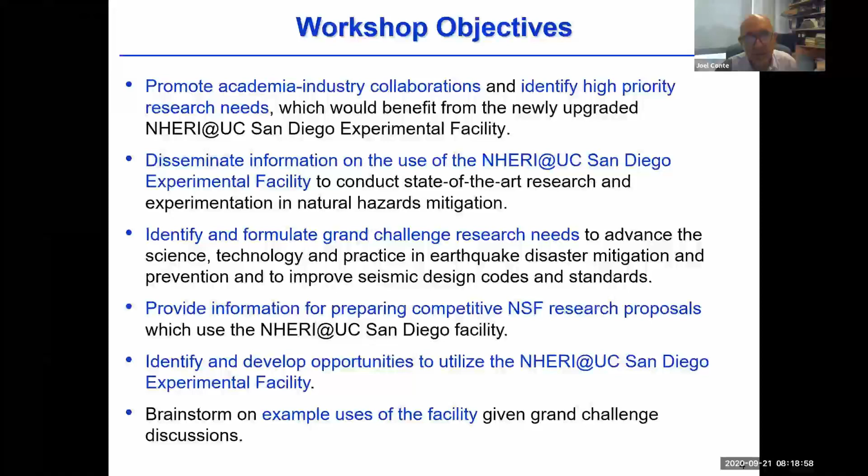And we'd like to brainstorm about example uses of our upcoming upgraded facility to resolve part of the grand challenges we will be discussing. So a few words about the agenda. After this introduction, I will present the capabilities of the NHERI at UC San Diego Experimental Facility.

Then we will have two of my colleagues, Professor Jose Restrepo and Tara Hutchinson, who will talk about highlights of recent projects conducted on the LHPOST.

Then we will have a number of keynote presentations, five of them, four today and one tomorrow. We have Professor John van de Lindt who will talk about building structures, Dr. Sissy Nikolaou about geostructures, Dr. Anthony Sanchez about bridge structures, and Dr. Craig Davis about lifelines and utilities. I will provide a few concluding remarks.

On both days we have reserved some time in the afternoon from 2 to 4. You can get more information about this on the agenda. We have reserved time to answer questions and provide advising on future projects. We call this office hours.

Tomorrow we will start with a virtual walkthrough of the construction site of the LHPOST6. We are going to call our facility LHPOST6 once it is up and running with 6 degrees of freedom. When we have the workshop in person, we usually give a nice tour of the facility so you can see the real thing, but we tried to create a virtual one.

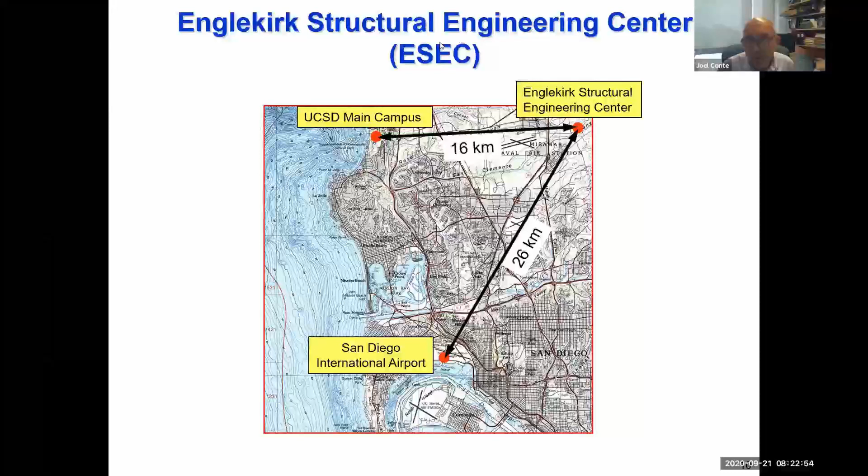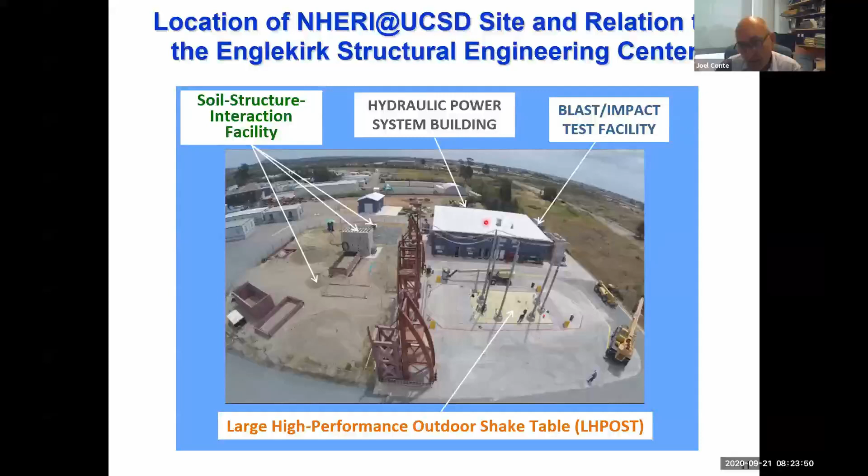We also have a soil-foundation-structure interaction facility there, with 2 refillable large soil pits on each side of a large reaction wall. We have the hydraulic power system building containing all the hydraulic power supply for the facility. We also have a unique blast impact facility that makes use of servo hydraulics and the same hydraulic power supply as the shake table.

The site is accredited through the International Accreditation Service, which means that in over 80 countries in the world, the tests produced at this facility are accepted with no questions asked.

We were first part of the NEES network, funded by the National Science Foundation. NEES stands for Network for Earthquake Engineering Simulation, from 2004 to 2014, for 10 years. We are now part of NHERI, which stands for Natural Hazard Engineering Research Infrastructure program, also funded by NSF, initially from 2016 to 2020, but NSF is in the process of renewing NHERI up to 2025.

Here we have the UC San Diego team, with pictures of everyone. I'm the PI. There are 4 co-PIs: Tara Hutchinson, Gilberto Mosqueda, Benson Shing, and Lelli van den Einde, each responsible for different aspects of the site. Professor Jose Restrepo and Enrique Luco are senior personnel - they were the first and second PI of the site, and I'm the third one.

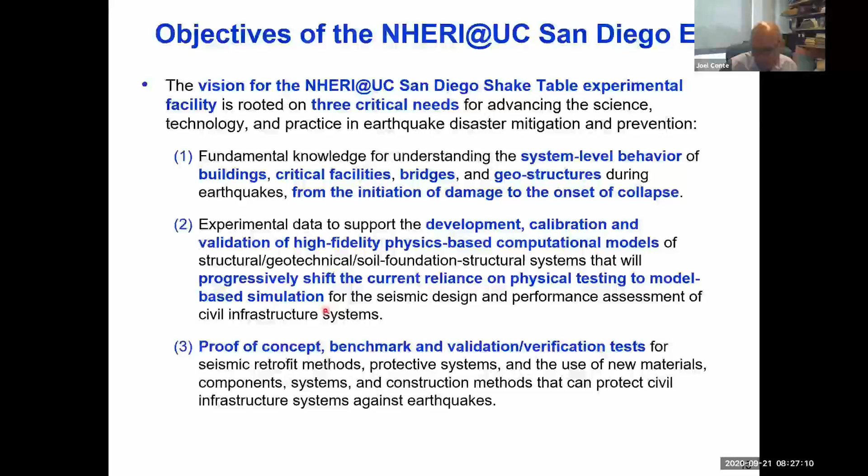When we designed the facility in 2001 to 2002, the key objective was to develop a shake table able to reproduce accurately large earthquake ground motions, especially those produced by near-source ground motions. Since we have a mild climate, we could build it outside, so we have no height limitation - this allows us to test specimens that could not have been tested in the largest shaking table in the world, for example at E-Defense. Many of our specimens could not have been tested there.

The facility was built in 2002 to 2004, commissioned on October 1st, 2004, as part of the NSF NEES network. Since then, we have conducted about 34 major research and a few commercial projects in 15 years of operations, closing on October 1st, 2019 for the upgrade.

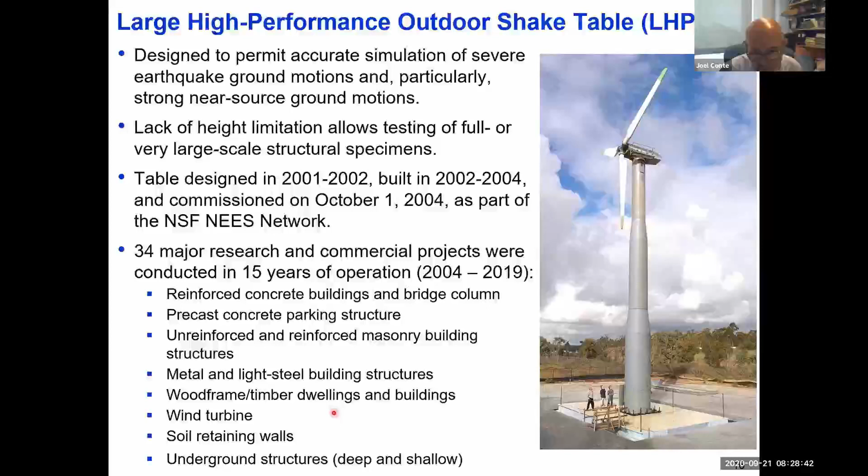Many of the specimens tested consist of buildings made out of reinforced concrete, precast concrete, reinforced and unreinforced masonry, metal, light steel, wood, timber, but we also have other types of structures like the wind turbine you see here, and geostructures such as soil retaining walls, underground structures, tunnels, and so on.

If we had soft soil at the site, it would have to be probably 15 to 20 times as big as what it is here. We took advantage of the soil stiffness and the radiation damping to have a light reaction mass, which helped us lower the cost.

The salient characteristics of the table are the stroke, plus or minus 75 centimeters, and a very important parameter, the peak velocity, 1.8 meters per second, which requires an incredible flow of oil to feed the actuators, as we will discuss more later. You can see the peak acceleration for the bare table approaching 5G, 1.2G when we have a 400-ton rigid payload. The frequency bandwidth is 0 to 33 hertz.

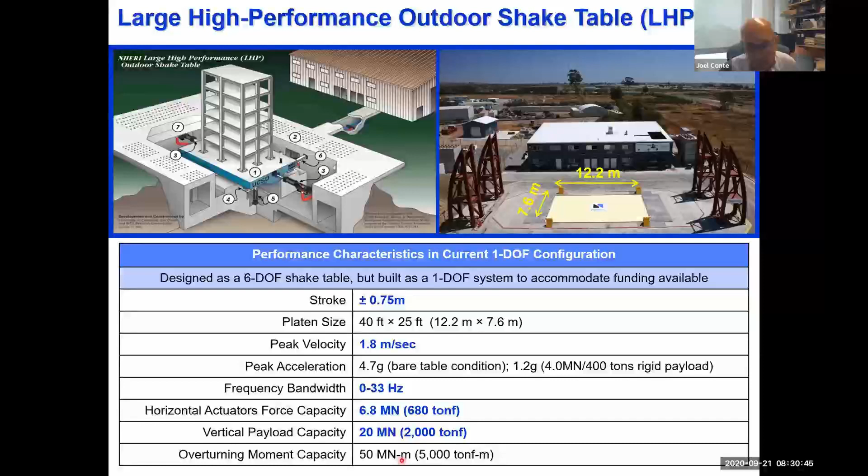The maximum horizontal force - a number we will use to compare with the upgraded version - is 6.8 meganewton or 680 metric tons. And the vertical payload capacity is 20 meganewton, with a very large overturning moment capacity of 50 meganewton meter.

To summarize, our shake table provides the ability to simulate near source earthquake ground motion, which involves large acceleration, velocity, and displacement pulses, allowing testing of densely instrumented, large or full-scale structural specimens. Also, when we use the shake table in combination with our two large soil boxes, we can also test geostructures at large scale.

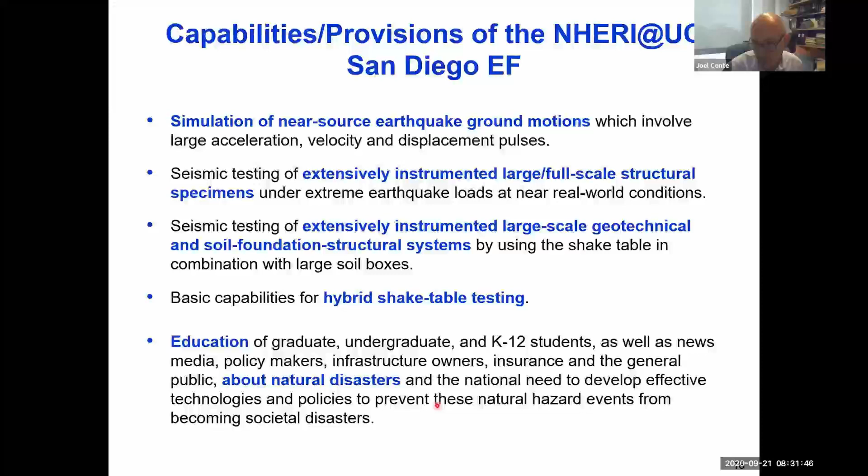We also have some basic capabilities for hybrid shake table testing. In terms of education, this is an amazing tool from kindergarten to graduate school, and also for news media, policymakers, infrastructure owners, insurance, and the general public, about natural disasters and the need to develop technologies to prevent these disasters from becoming societal disasters.

Now let's look at the components of the shake table. First, the LHPOST, the 1 degree of freedom version, and then I'll explain the changes we are making to convert it to 6 degrees of freedom.

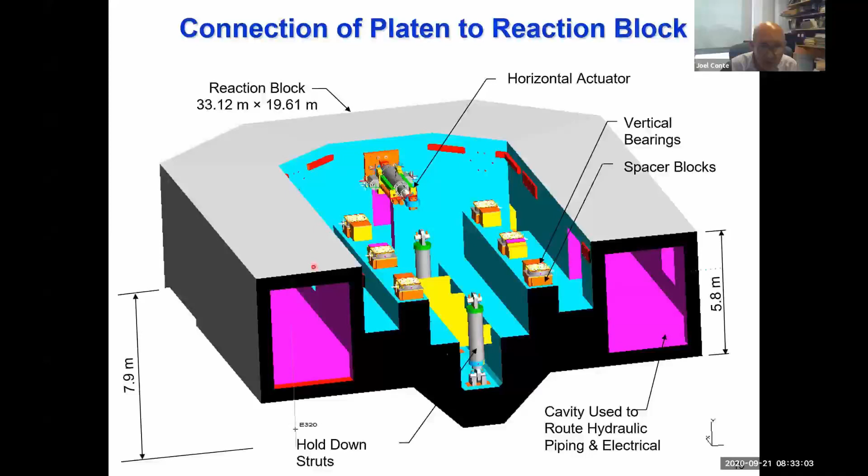Appreciate the size - the length of the reaction mass is 33 meters, width almost 20 meters, and the largest depth is 8 meters.

Here you see the platen, the longitudinal actuators, and the 2 hold down struts. As part of the upgrade, we are going to need a 3rd hold down strut. You see we already have the plates here, and the saddle blocks are ready to receive it.

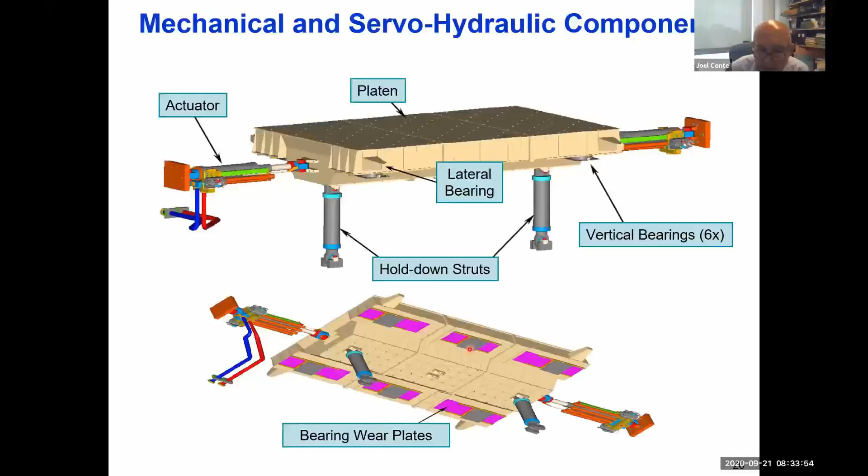Here's a view from underneath. When we move the platen, it moves on top of the vertical actuators through these wear plates, represented in pink here. As part of the upgrade, we have to replace these wear plates with much larger ones, since now the table can also move in the transverse direction. These gray plates you can see here are the pressure balance bearings on top of the vertical actuators.

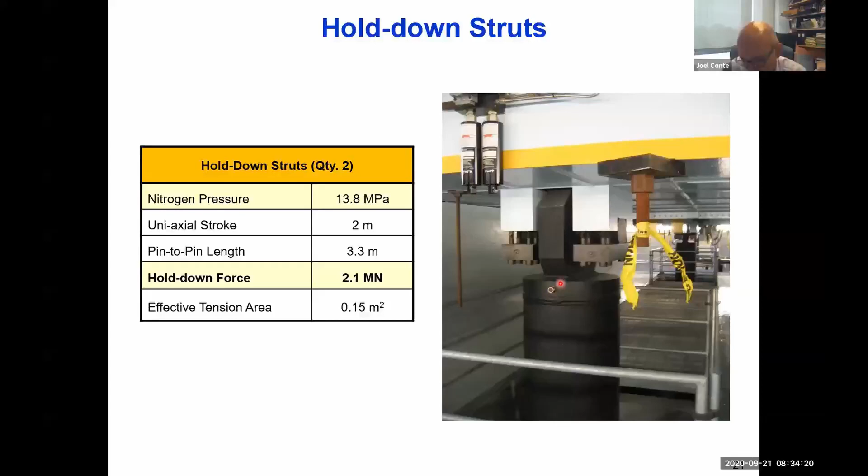Here's a picture of the hold down strut, which applies a very large downward force of 200 metric tons. The weight of the platen for the 1 degree of freedom was 145 metric tons. So we have 2 gigantic forces of 200 metric tons, one at each end of the platen, for the overturning moment capacity. You also see here the horizontal actuators.

We had 2 horizontal actuators for the 1 degree of freedom. They can push more than they can pull, but since we have 2, if you add these numbers, you have 6.9 meganewton of push and pull on the platen. Each of these longitudinal actuators is equipped with 2 very large servo valves, with a very high flow of 2,500 gallons per minute each. That's what is needed to reproduce the peak ground motion velocity of 1.8 meters per second.

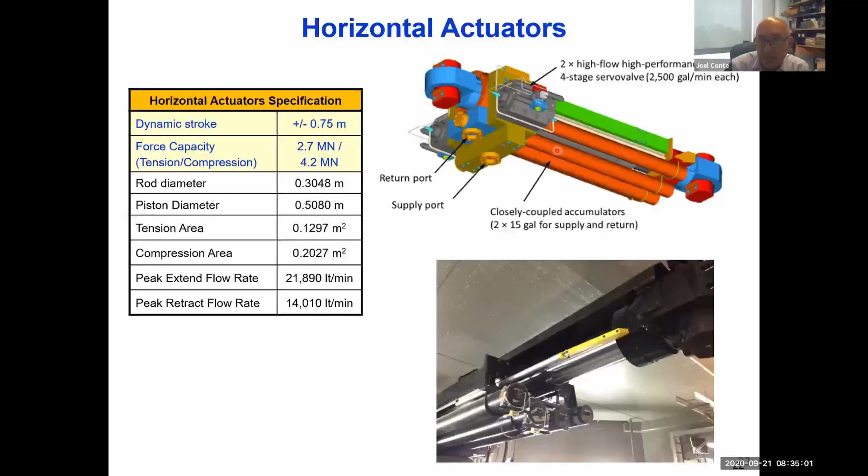So this is one of these servo valves, gigantic. It's a 4-stage servo valve. Those of you who are interested in servo hydraulics can see here the 4 stages. The spool that we can see here inside the sleeve for the 4th stage is gigantic.

It weighs 320 kilograms, and you see that's where we receive the high pressure fluid at 3000 PSI. It arrives in this cavity here, and when the spool moves to the left or to the right, you can see these port windows. Then they would port the fluid either to the left or the right of the piston in the rod, and then the rod would either extend or retract and push and pull the table.

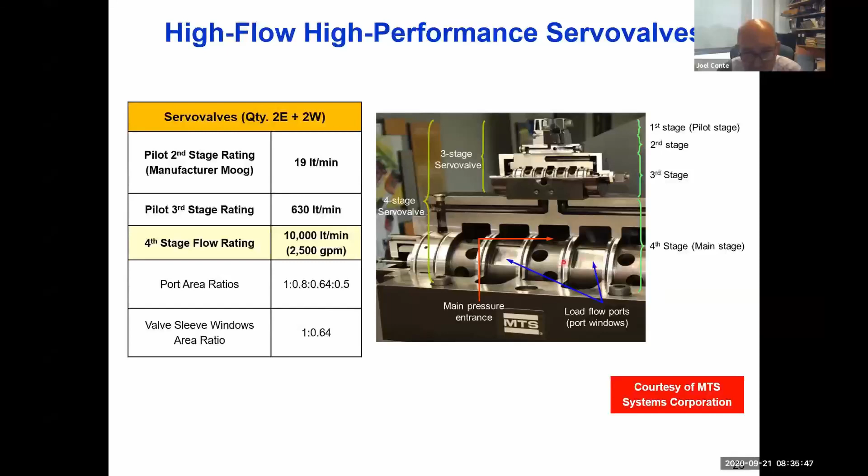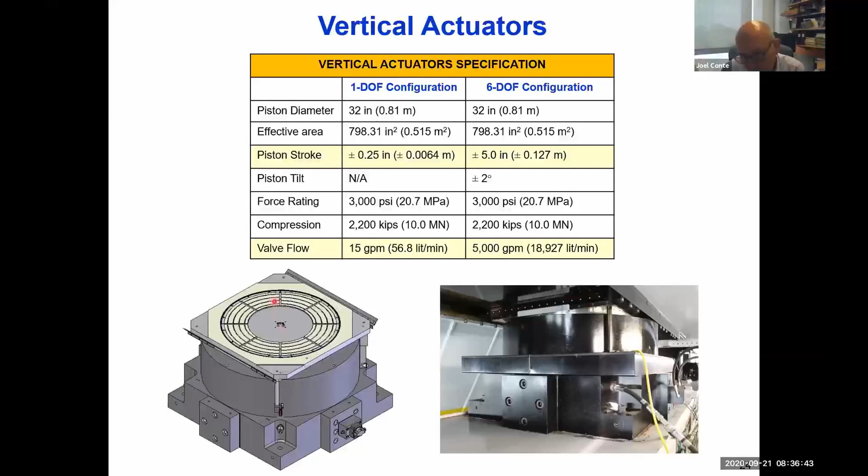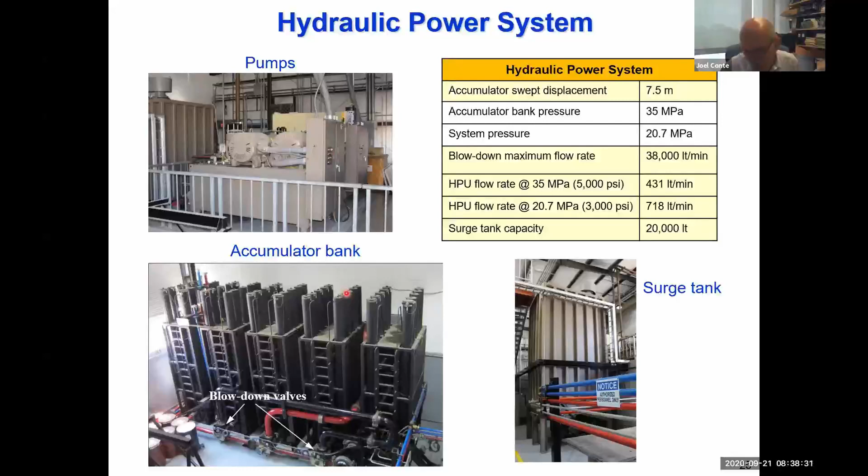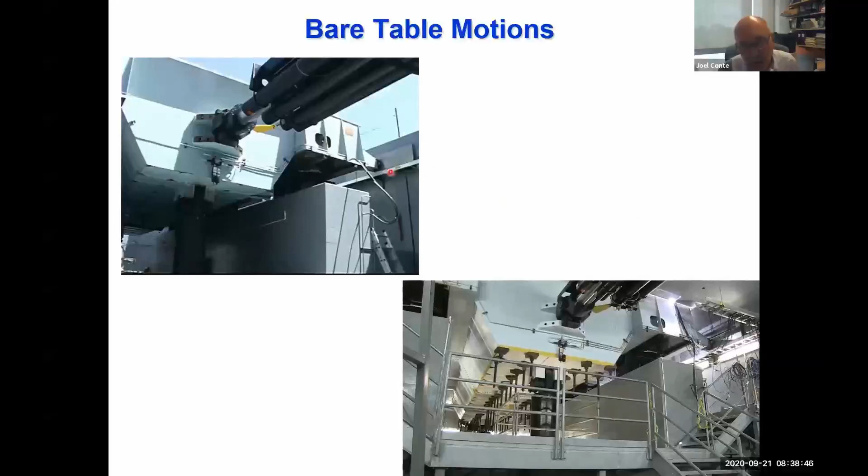So here, this was during commissioning a long time ago in 2004. You can see how it works. You could see a view from underneath here with the nitrogen-filled cylinders.

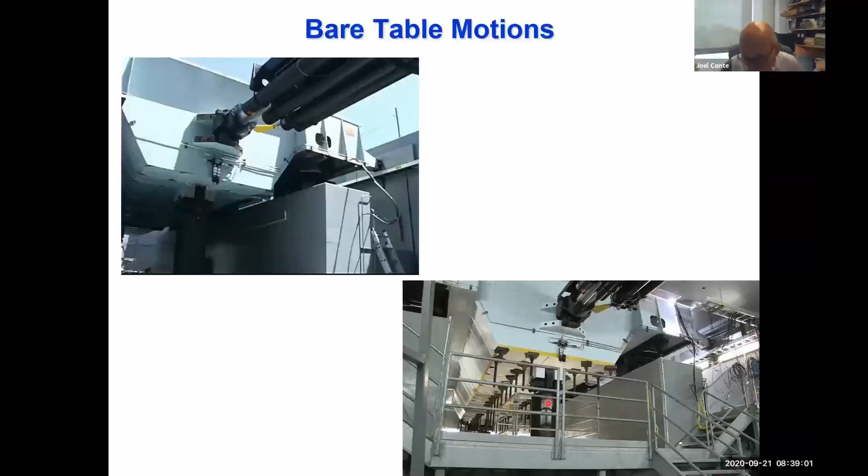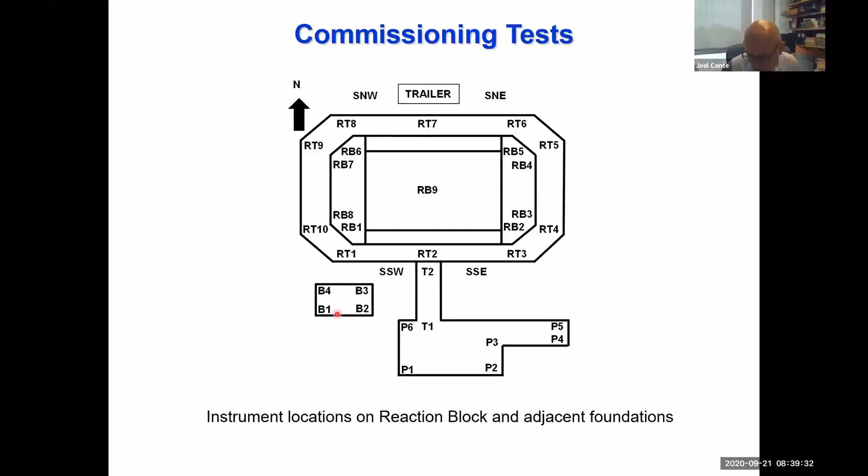This slide is important because it shows you the frequency response function of the reaction mass of the block. When both shakers at both ends were in phase and applying force in the east-west direction, shown by my cursor here, the horizontal displacement at the top of the reaction mass, the blue curve here, is shown as a function of frequency, with the forcing function applied scaled to the maximum force that the actuator can produce.

Of course, the shakers could not produce this force. Later on, when we had the actuators, we did a test of linearity, and everything behaves quasi-linearly. In other words, we could scale the frequency response function from our test with the shakers, scale them up, and get the same frequency response curves as we got when we were using directly the actuators acting on the reaction mass.

So you can see here that we have a characteristic frequency, a natural frequency so to speak, of the mass in the soil at about 10, 11 hertz, but it's a broad peak. There is a very high radiation damping, about 30 to 40%. And look at the deformation, a quarter of a millimeter, very, very small.

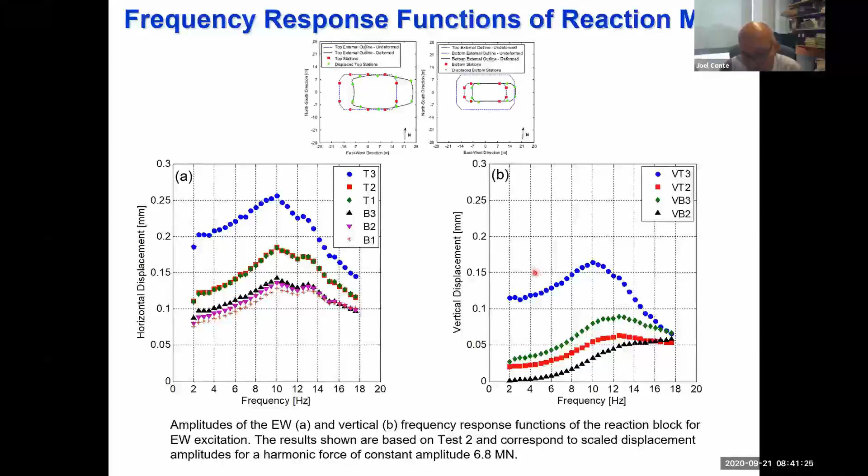We also did some tests in the north-south direction, and this is published, for those of you who are interested.

Let's say a few words about the MTS Three-Variable Controller, the 469D, that was used on the LHPOST 1 degree of freedom and will also be used in the upgraded table. This is a controller used in all large shake tables manufactured by MTS. I should have mentioned early on that the design of this facility is a joint effort between a team of professors here at UC San Diego and MTS Systems Corporation for the initial design and now also for the upgrade.

This controller is a linear state variable controller, the three-state variable controlled by this TVC, which stands for three variable controller - displacement, velocity, and acceleration. We can choose the mode, which basically tells you what signal you're going to provide to the controller as a user. Most of the time we provide an acceleration signal, the earthquake accelerogram that we want to reproduce.

This controller has special features to compensate for various sources of signal distortion due to linear or nonlinear dynamics. The options are different if you want to reproduce harmonic motions or a broadband signal like an earthquake record. The ones we use most when reproducing earthquake records are the adaptive inverse control, AIC, and the online iteration, OLI, which is an iterative signal matching technique.

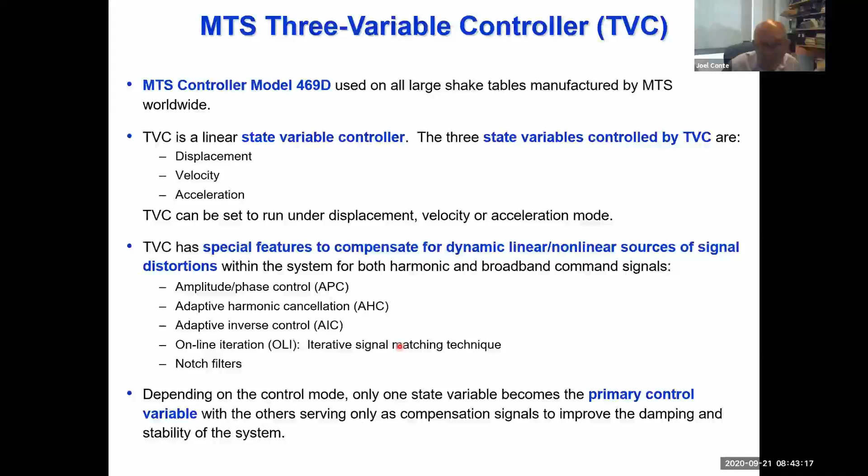On this slide there's a lot of technical information, but I think some of you are interested, so just a few words. You see a block diagram of the TVC part of the controller for 1 degree of freedom LHPOST. There's a reference generator where you bring your signal, typically the acceleration, and the reference generator will integrate to get velocity and displacement, and differentiate again to get the jerk, the third derivative of the displacement. All these signals are used in a feed-forward way in the control loop.

So there is a feed-forward gain, a control feed-forward gain here. It gives a lot of flexibility to shape the transfer function of the shake table system.

In terms of feedback signals, we measure the acceleration feedback and the displacement feedback through the LVDT associated with the longitudinal actuators, and internally the controller computes the velocity. But all three signals are not just measured - they are measured and then recomputed, considering that at low frequency the LVDT produces the most accurate signal for displacement, and at high frequency the accelerometers provide the most accurate measurement. So they are hybrid signals reconstructed to get the best possible estimate of the true displacement, velocity, and acceleration. And there is the force feedback, the delta pressure feedback coming from both actuators.

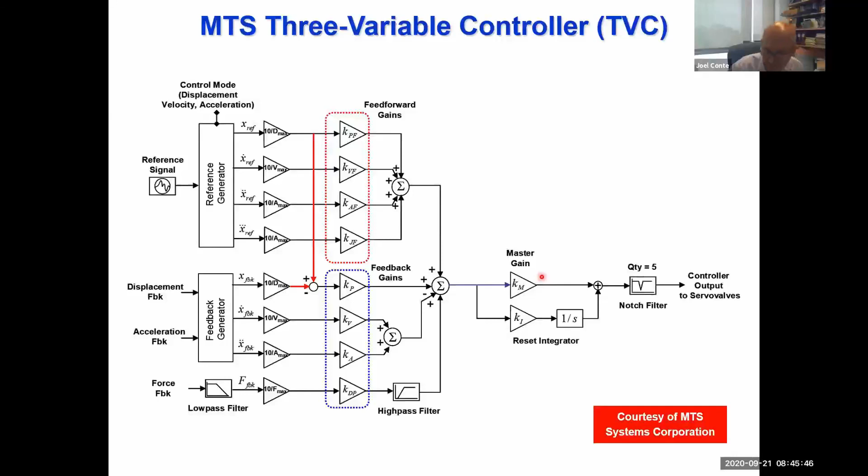So when we tune the controller for a shake table test, if you come and do some test here, we will ask you to give us your earthquake records. For each of them, the shake table operator will spend some time tuning the table so that this ground motion record you give us will be best reproduced on the shake table system.

The tuning process consists of 3 steps. The first step, the shake table operator iteratively keeps changing the control parameters, the feed forward gain and the feedback gain, until the shake table is able to reproduce a random type motion that we call white noise at an amplitude of root mean square about 7% G.

The shake table operator sees the signal on the screen, the time history, and keeps changing the gain until these time histories are reproduced pretty accurately, or until the transfer function is as close to 1 as possible. Of course it can never equal 1 because it's a very complex dynamic system. You can see here an example, the black curve is the transfer function at a certain stage of tuning.

Then in the second step, the inverse transfer function of the shake table system is estimated as accurately as possible using the AIC technique, adaptive inverse control. This AIC is used when we go to the third stage, basically OLI, which consists of changing the drive file to the controller until the output on the table is as close as possible to the ground motion we want to reproduce.

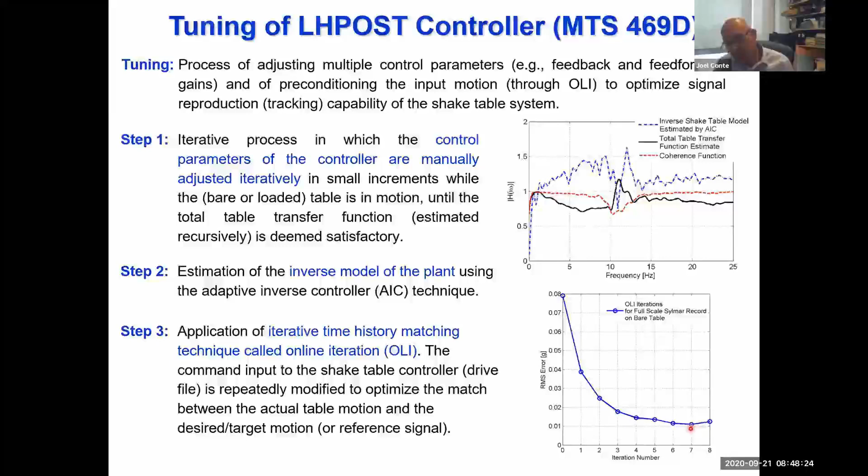You can see that this way we have the root mean square error between the target signal and the one reproduced on the table. That error goes down iteration by iteration until you reach a point where it cannot go down further and starts to increase again. At that point, we save the drive file, and on the day of the test, we use that drive file to reproduce the earthquake motion on the platen.

This is to show you the accuracy of the LHPOST 1 degree of freedom. You can see here we were trying to reproduce an earthquake record from the 1994 Northridge earthquake. You can see the acceleration time history, the target in red and the one achieved by the table in blue. You see the zoom here, very accurate.

You see here also the achieved and target spectral displacement and pseudo acceleration spectrum. We are very proud of this. It's very, very difficult for such a large shake table facility to have such accuracy.

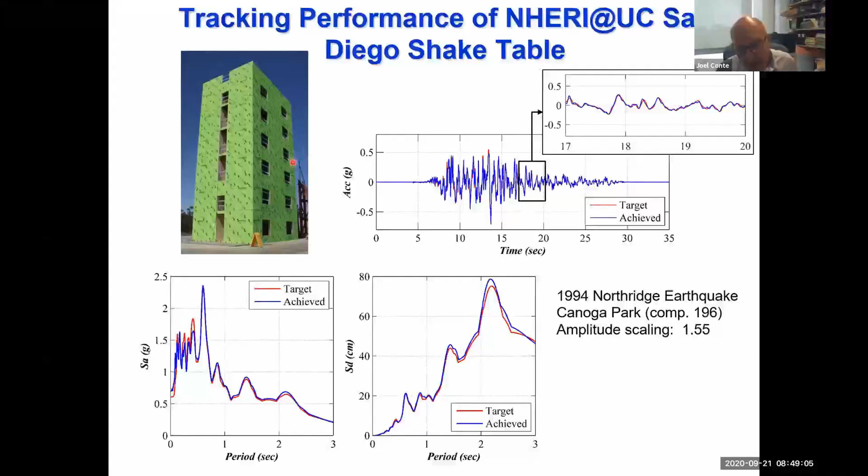In terms of instrumentation, whenever we test a specimen, we have a large number of channels. We have 12 nodes at 64 channels each, 768 channels. Some of them have to be used for the machine itself to understand the response of the platen and so on, but still overall a very large number of channels.

We will have a brand new data acquisition system. In the past we had 16-bit, but we were just awarded an MRI proposal from the National Science Foundation to update the data acquisition system. We will have 24-bit analog to digital resolution, perfectly simultaneous sampling and not multiplexing, and over 25,000 samples per second per channel available.

Typically we sample at 200 or 250 samples per second. So we have an inventory of instruments: accelerometers, displacement transducers, string potentiometers, load jacks, load cells, soil pressure transducers. We have a GPS system that allows us to get displacement time history in 3 directions at 50 Hertz with an accuracy of 1.5 millimeter.

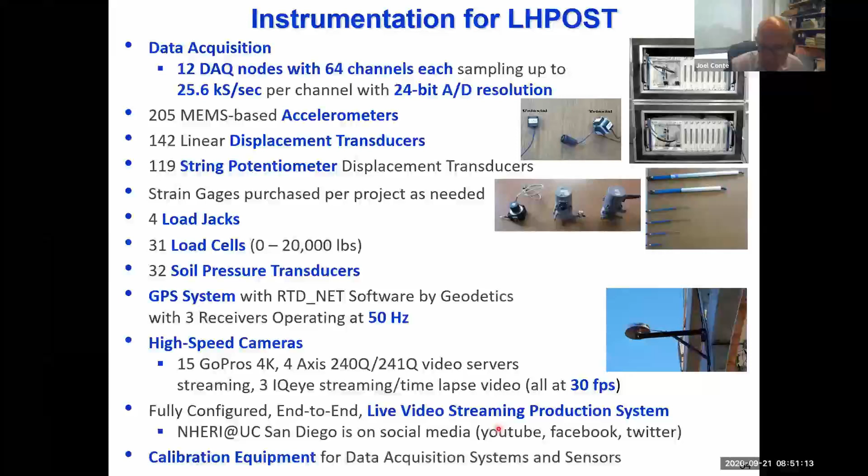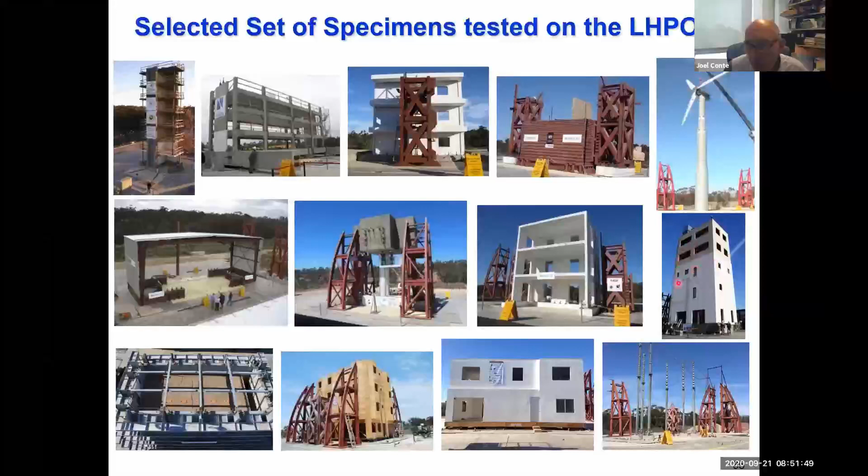This slide shows you a number of landmark tests or specimens that were tested on the shake table. You will see short movies about some of them from some of the speakers today. I will show a few in this presentation. You can see a precast concrete building, a metal building, a 7-story slice of a building, a bridge pier full scale, a retaining wall, a 5-story building with all non-structural components and systems, and so on. Now I'm going to show you a few short movies about some of these tests.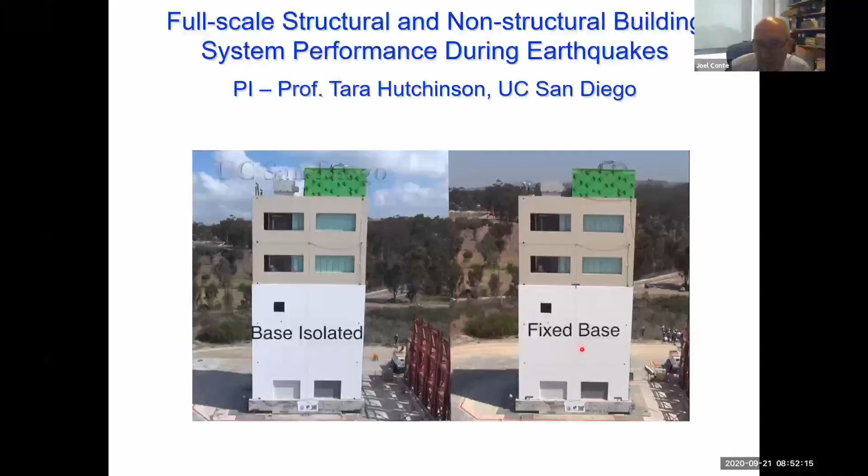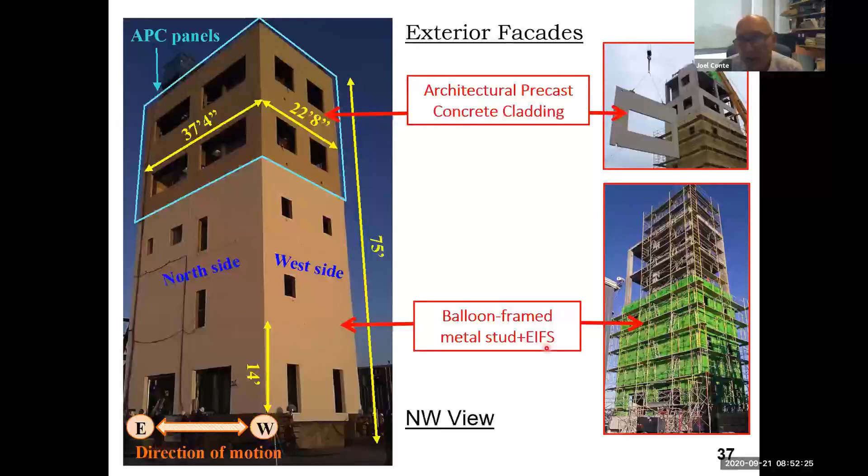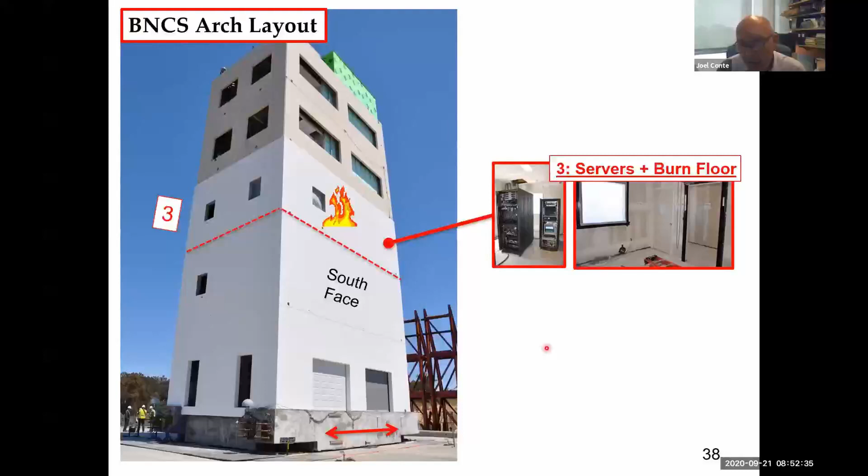This was a full-scale 5-story reinforced concrete building with non-structural components and systems, first tested on base isolators, one at each corner, and then fixed to the platen to simulate fixed base condition. This building had 2 different types of facade, light facade on the bottom and heavy precast concrete cladding on the top. Every floor had a different utilization to simulate a real building. We even had an intensive care unit on the 4th story and a surgery suite at the top.

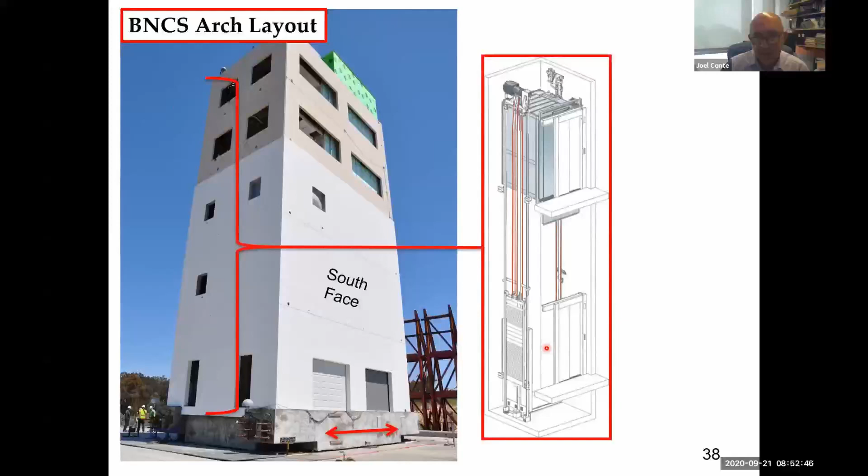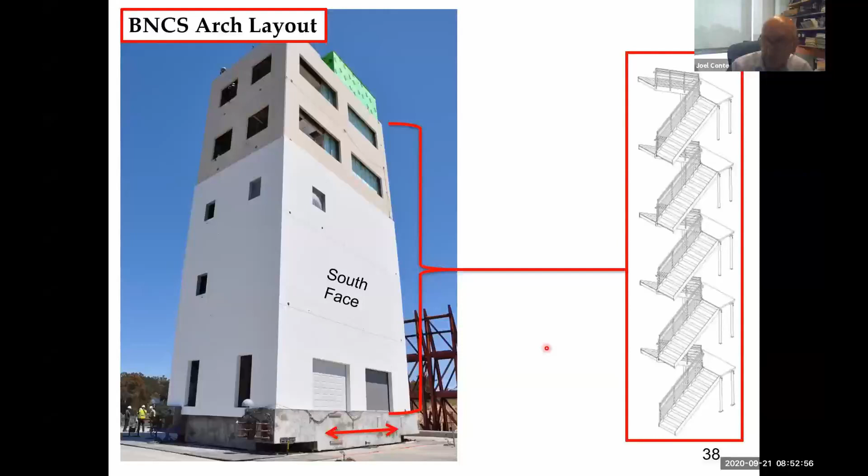And we had a fully working elevator and stairs. So, for example, that non-structural component would be very difficult to have available at reduced scale, right? So the need for full scale here was important.

Now a short movie: every time there is an experiment, the research team has already created a model of the experiment before the test. They have their best prediction ready to compare with the experimental results. Here we compare in red the experimental result and in blue the prediction. You see the finite element model of the seismic isolators, the acceleration on the table, the shear strain in the isolators, the displacement at the 3rd and 6th story, the interstory drift ratio, the floor acceleration, floor shear, and floor overturning moment.

I'm going to play this here. During this test, the shear strain in the seismic isolators reached 150%. You can see that the blue and the red are pretty much on top of each other. It's easy to predict because the response of the building, except for the base isolators, is linear. You can see here the total base shear versus the shear strain in the isolators. Now let me go back and play this again, because we were playing the same earthquake, from Peru, 2007.

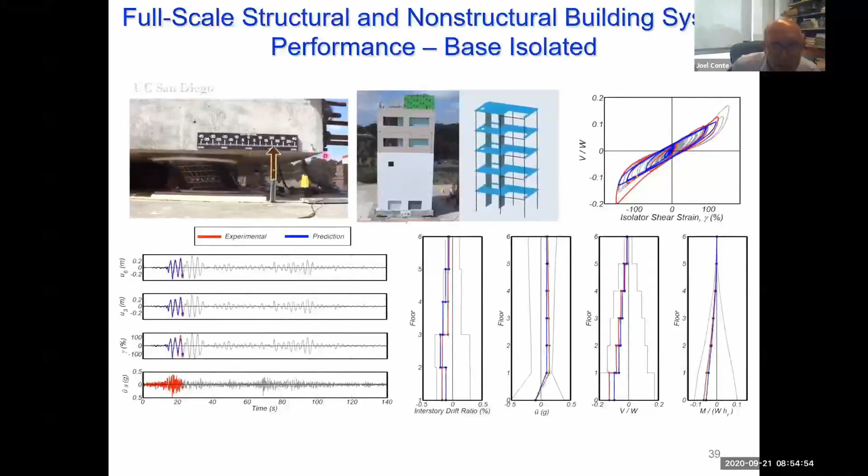The Peru earthquake at Ica was played at 140% scale for the base isolated building and 100% for the fixed base, so it was higher for the base isolated case. If you followed the movie, let me play it again: you will see that the beds in the hospital room at the top, for the fixed base, were very disrupted and topple over, while here in the base isolated system they are just slowly rolling.

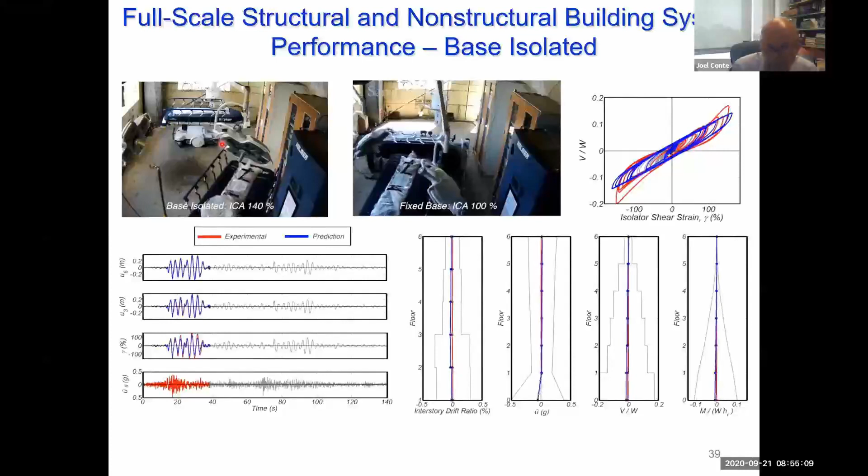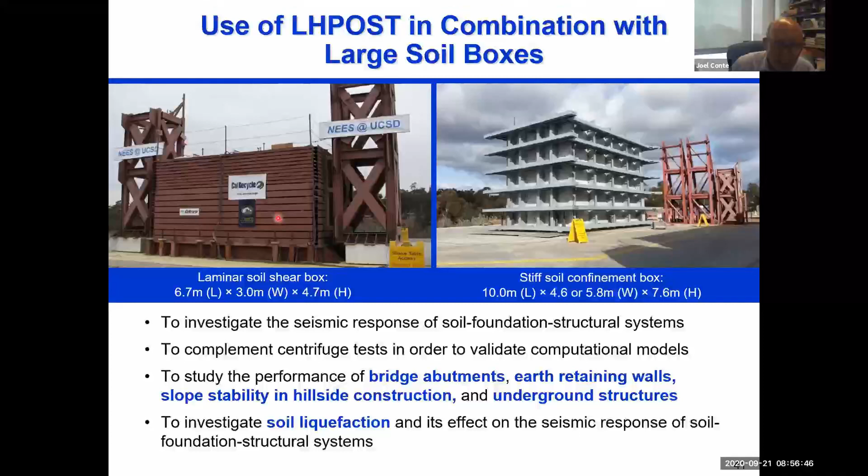We can also study soil liquefaction by putting a liner inside the box to contain the fluid and saturate the soil inside. Here's a short movie from one of the tests performed by Professor Elgamal. You see the construction of the laminar box - it takes about a week to set it up - and the installation of a single pile in the box and the filling of the box with multiple layers of soil. Here's a snapshot of the box during a test; notice there is a ramp. I'm not an expert in geotechnical earthquake engineering, but I know soil liquefaction is accentuated if there is a slope in the terrain, and the soil spreading due to liquefaction will be accentuated.

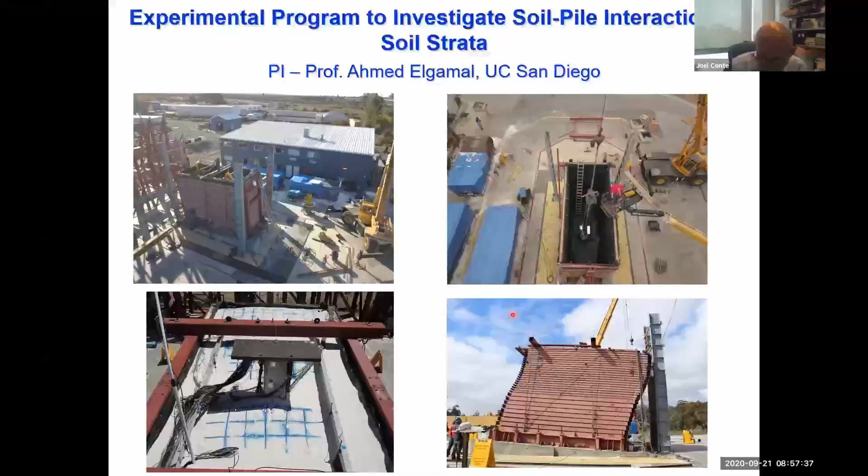So here you are going to see two movies in parallel. Look at the response of the shear box - you will see a little leak of water at some point, and you will see there is a layer that is much more vulnerable to liquefaction than the rest, so you will have a shear strain much larger there. You already see it here because that picture is from the middle of the test - the layer has very large strain due to soil liquefaction. Then you will see the lateral soil spreading, gradual migration of the soil to the right, and of the pile as well.

See the water leak here.

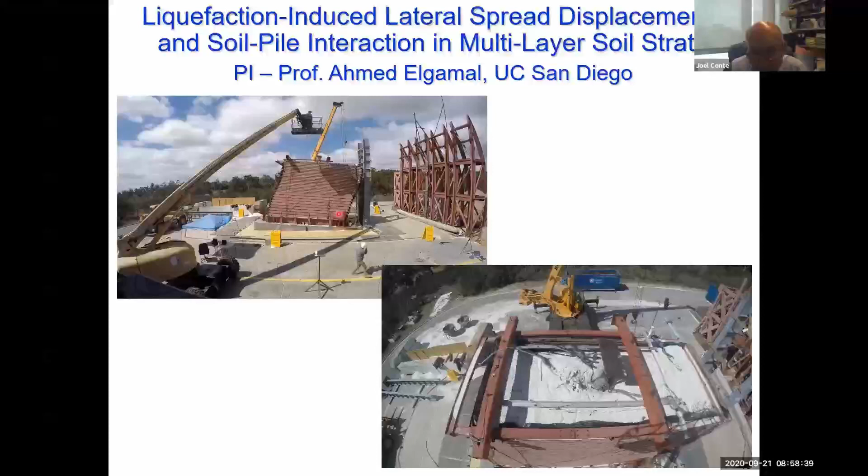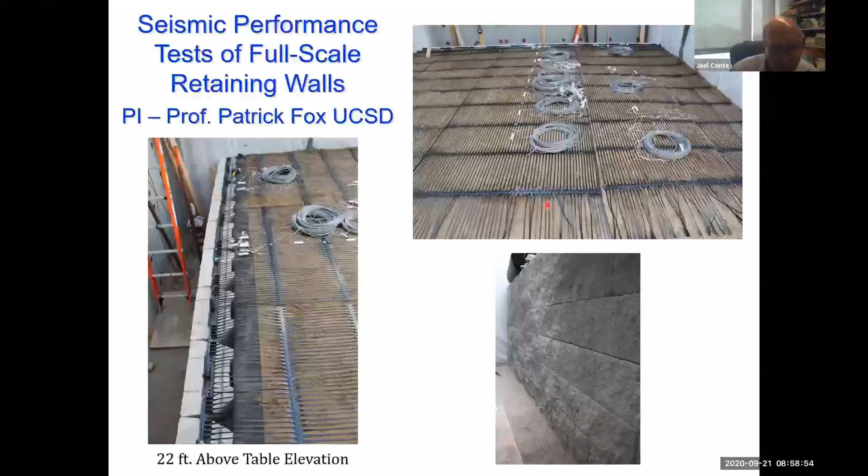Here we see a retaining wall with reinforced earth. Professor Patrick Fox, when he was here, set up a lot of instrumentation: accelerometers in the soil, strain gauges in the synthetic material. So you see a test here.

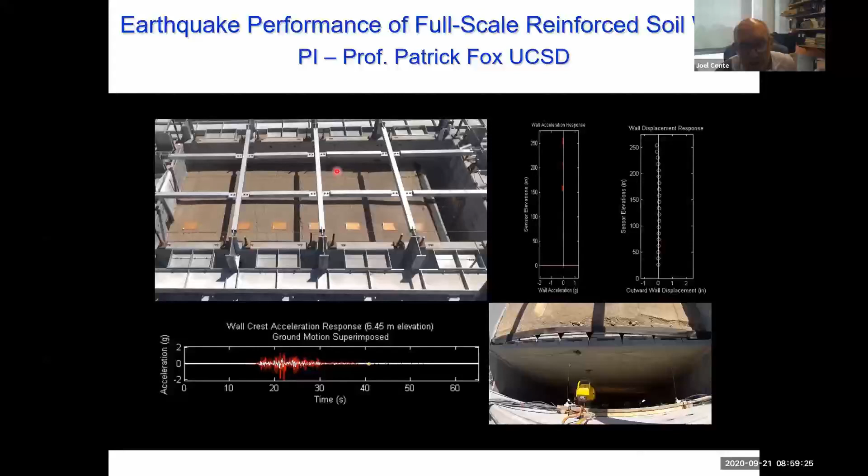You see string potentiometers to measure the displacement, and the results of the string potentiometers here, and the accelerometers here. In white is the acceleration of the table, and in red is the accelerometer at the crest of the wall, showing a very large amplification. And you see some significant cracking in the soil here.

Here's one more test about soil-foundation-structure interaction. The California Department of Transportation is very interested in designing bridges with columns on foundations that rock on the soil, pushing the nonlinearity to the interface of the foundation and the soil, and out of the structure.

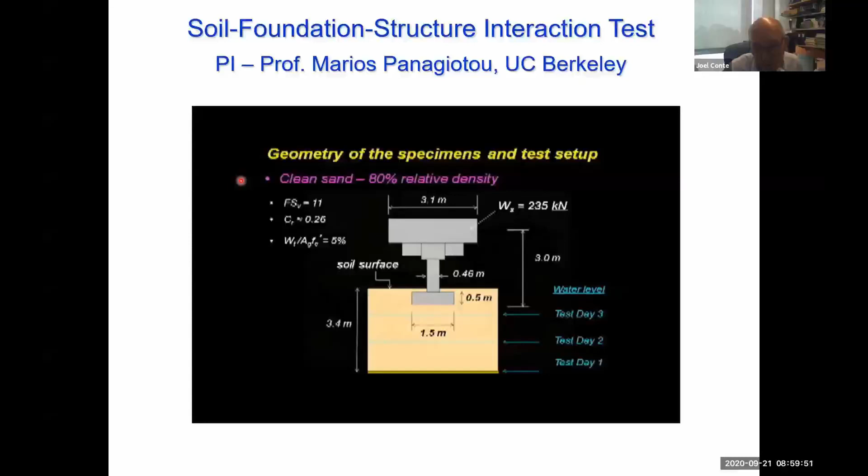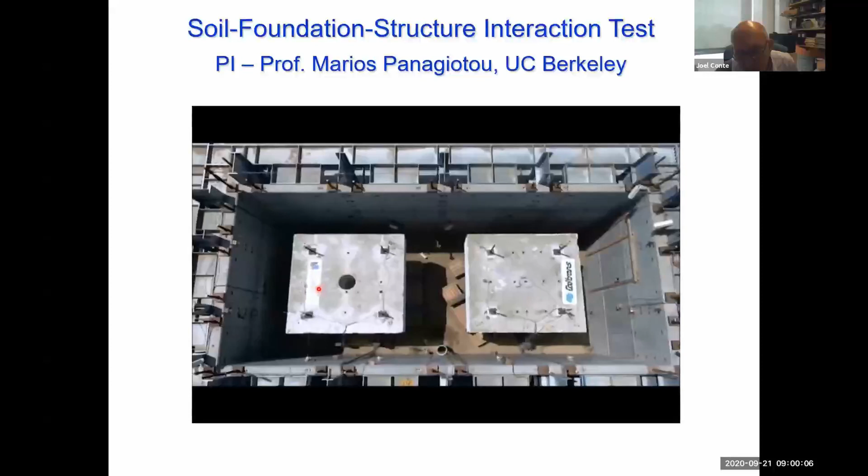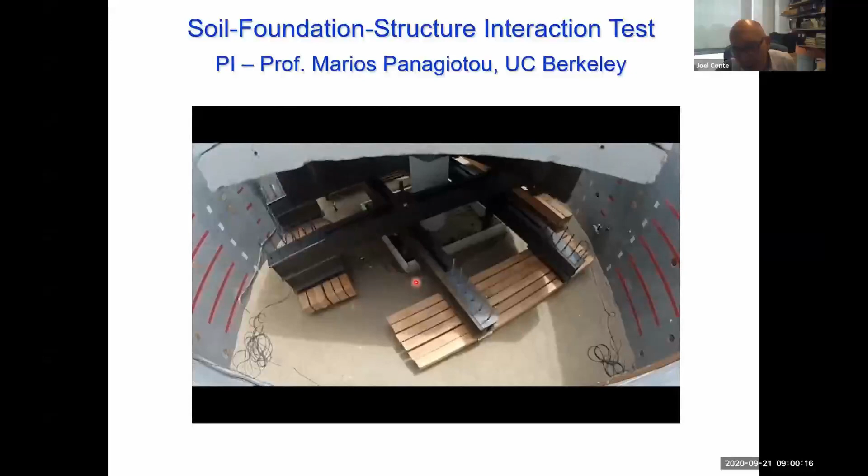So here we're going to see two specimens, one rotated 45 degrees, two columns with a very large tributary mass at the top, inside the large box that we have. All this outrigger is to prevent the column from tilting and damaging the box. It's not part of the specimen, but you can see it here.

With our camera, we can get amazing shots that speak more than many, many sensors.

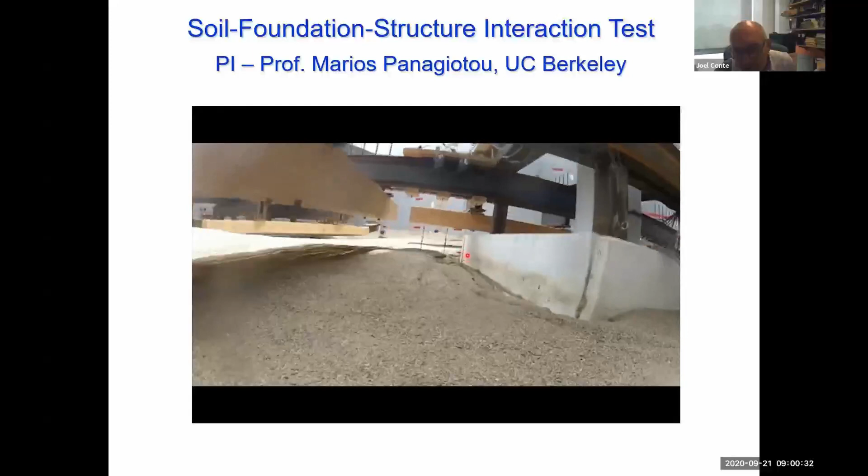We also have a staging facility that is even larger than the footprint of the platen. The platen is 40 feet by 25 feet, and the staging area is 44 feet by 30 feet, 3 feet deep. This is for building specimens up to 100 tons, which can then be moved with a crane to the platen, to increase the workflow and throughput of the facility, or to build a big component of a very large specimen and then bring that component onto the platen.

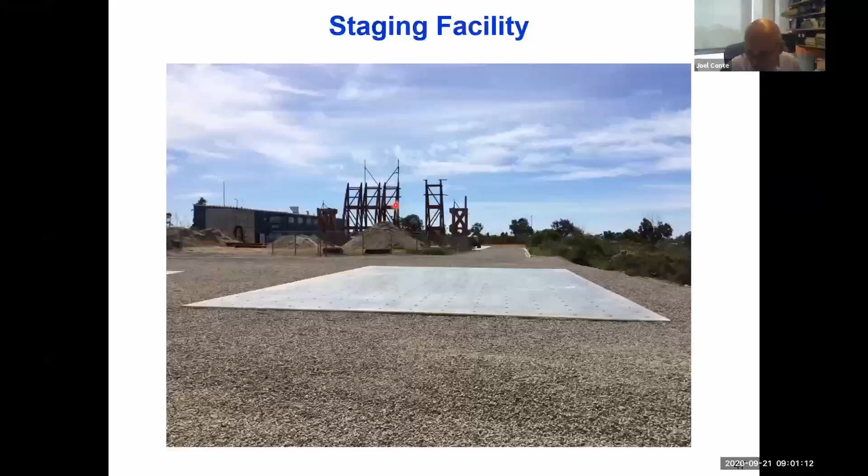A few words about hybrid shake table testing. We have some basic capabilities in terms of hardware and software, which you can see here. I'm showing two cartoons here to illustrate this.

One example is a tall building where the top few stories act as a tuned mass damper, connected to the remainder of the building through passive, semi-active, or active devices. We could test these top few stories on the shake table platen with the devices, while the bottom part of the building is modeled in the computer. Using hybrid testing, at every time step we measure the force feedback from this part onto the platen and bring that information into the equation of motion in the computer, combining it with the equation of motion of the bottom part to predict the response of the complete system at the next time step.

At the next time step, we get the displacement, which we command on the shake table. Unlike standard shake table testing, where you give the complete signal at the beginning of a test, here you send the shake table controller one value at a time, in real time.

Another example: a building with a stiff mat foundation on a group of piles. The piles and surrounding soil would be modeled in the computer, and the building on the shake table. At every time step, we would command the total foundation motion to the shake table.

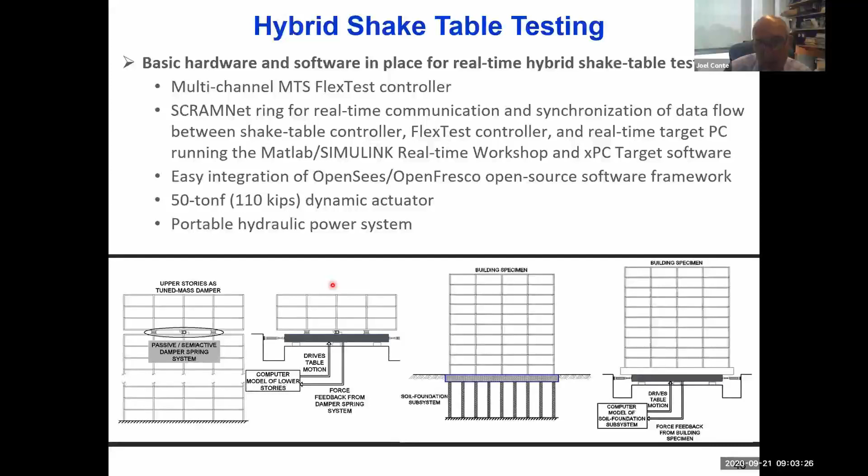Now let's talk about the upgrade to 6 degrees of freedom. So far we've seen the 1 degree of freedom table. From 2004 to 2009, we had just pressure balance bearings, that's it. In 2009, we added 6 vertical actuators, but they were non-ported, so they could not be used dynamically.

And then you can see here, all of this is the picture of the 1 degree of freedom hydraulic power supply. You have seen the accumulator bank, the 2 pumps. We have 1 pressure line, 12-inch diameter steel pipe.

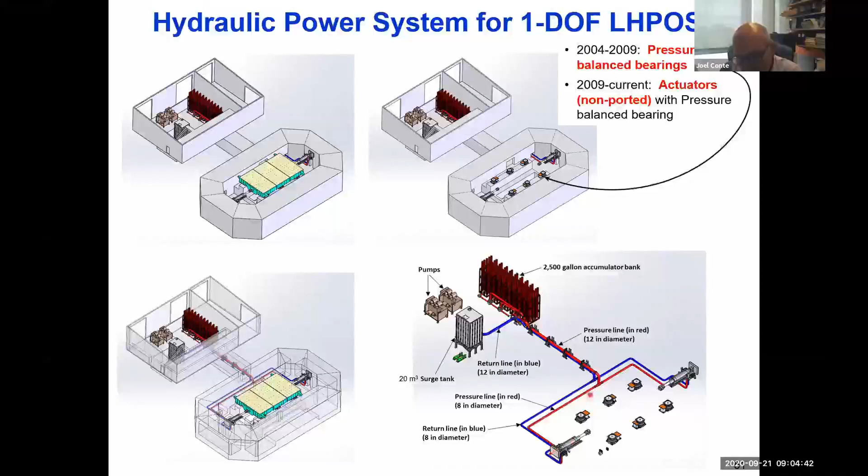And then when you are in the reaction mass, it becomes an 8-inch diameter pipe, one going to the west actuator, one to the east. And the blue pipe is the return flow.

So the idea that we already had in 2004, 2002 - that slide comes from 2002, before we trimmed the corners of the reaction mass to lower the cost. The idea was to have a V-shaped horizontal actuator and add one hold-down strut in the middle.

At the time, we thought doubling up the accumulator bank would do it. When we started to do accurate calculations, we realized we need to multiply the accumulator bank by 4.

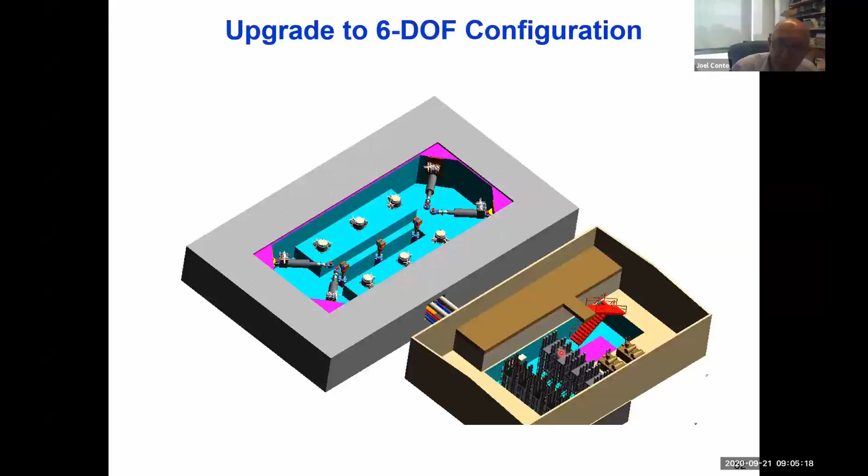So this is now the new hydraulic power system. Again, we remove the existing accumulator bank and have one that is not 2,500 gallons, but 10,000 gallons - a very different type of accumulator bank.

Tomorrow you will see it in the virtual tour. It's very impressive, incredibly tall bottles. We had to acquire 2 more pumps to pressurize the accumulator bank. So we have 3 pumps that pressurize the accumulator bank at 5,000 PSI and 1 pump that is used to provide the pilot flow.

Okay, so just checking here the time. Yeah, all right, so you can see here a few things.

We have to double up the number of pressure lines. We need 2 now, 12-inch. When we are in the pit, we have a complete ring. We have to feed every one of the 6 vertical actuators. So we have a pressure main ring and then a pressure main return.

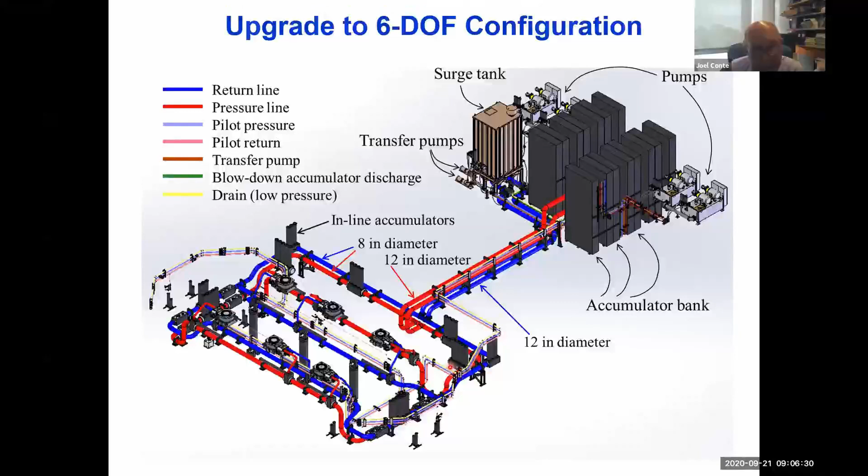You see here a few nice renderings showing the pressure line and how with this manifold it feeds every vertical actuator, and then you have the return line in blue. You see the V-shape actuators, and the vertical actuators ported now, each with a very large servo valve. You see one here, and the base plate for the horizontal actuator.

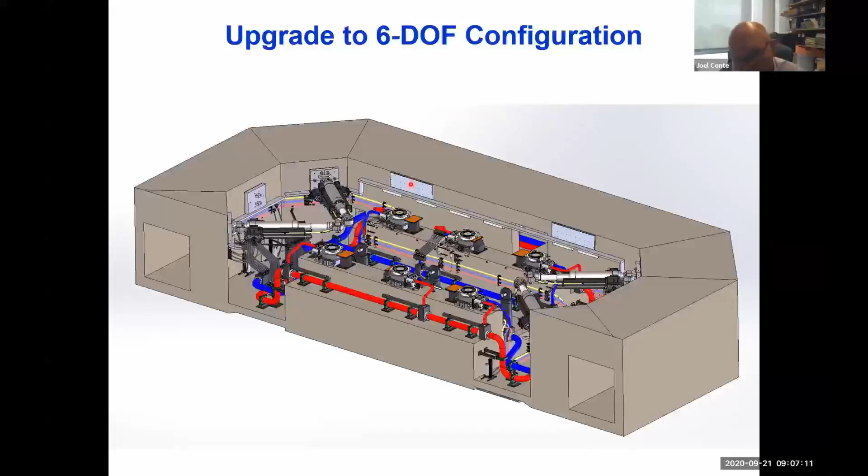We are in the process, as we speak, of installing those and post-tensioning them to the reaction mass. We also have these plates here that are impact plates for the crash protection system, which I will say a few words about. So you see here the vertical actuator and the new servo valve, 5,000 GPM - very, very high flow because of the large cross-section area of the vertical actuator.

You see here that we need to bring that 3rd hold-down strut in the middle. Everything was ready for it - we just needed to order from the same supplier as the other 2. You have a lot of in-line accumulators here, as you can see.

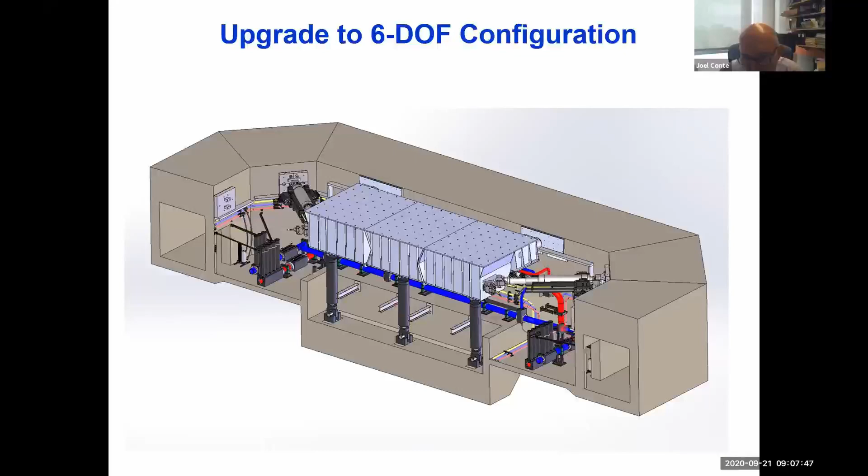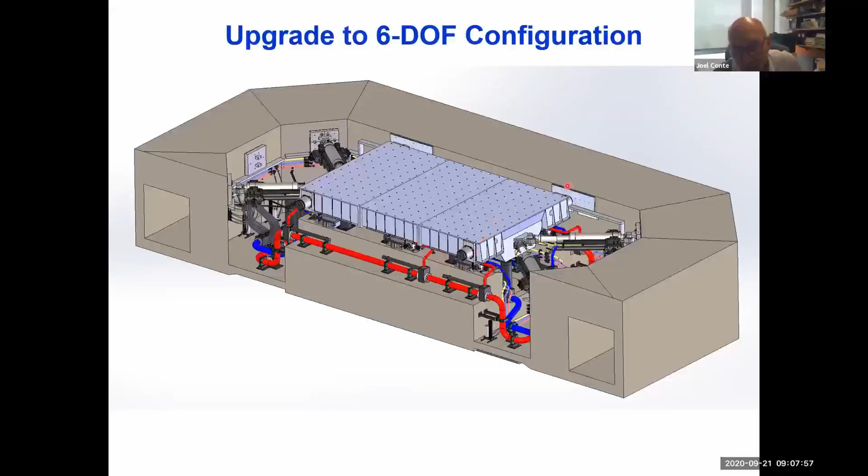And here you see that we will have bumpers - one at each corner, call it the crash protection system. You probably wonder why. This slide should explain it to you.

So in order to prevent this from happening, we have 3 lines of defense. The first one is to program the limit in the controller. If this does not work, we also have physical limit switches that communicate with the controller of the shake table to abort the test if these limits are detected. And if these 2 do not work, then we need to absorb the crash without damaging the reaction mass.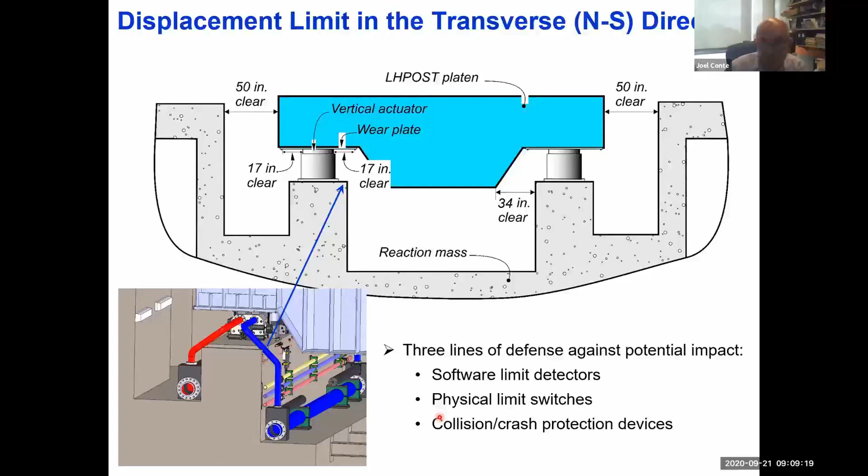This was designed - these bumpers here, each of them has 42 rods. When you have an impact, you push on the middle part, it puts the rods in tension, and it yields them.

The design criteria was to stop a specimen of 1,000 ton moving and impacting the reaction mass at 1 meter per second, with 2-inch displacement. Since we had 17 inches, we want to allow only 15 inches of displacement for testing, because from 15 to 17 is to absorb the impact if we have to.

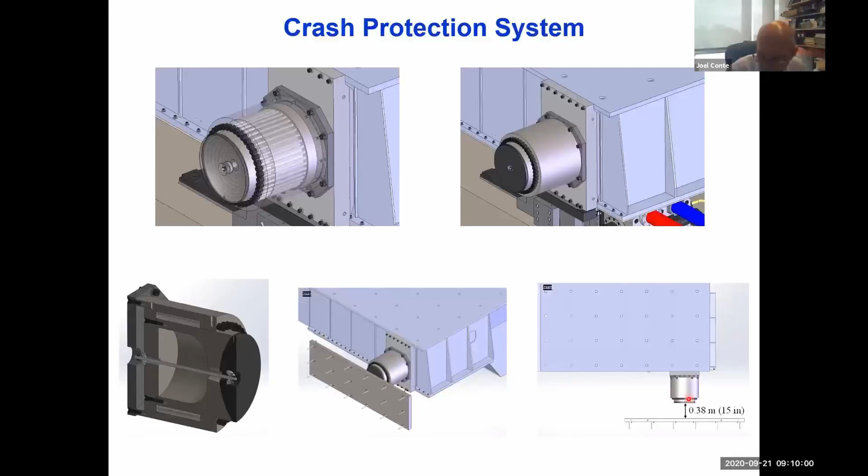We are going to reach 2.5 meter per second in the X direction, 2 meter per second in the Y, 0.6 meter per second in the vertical. Remember, 6.8 meganewton was the peak horizontal force for the 1 degree of freedom. We are now exceeding 6.8 in the transversal, 8.38, and 10.6 meganewton in the longitudinal.

And then the peak rotation, 2.2 degrees, 1.5. This is the roll, plus or minus 2.2 degrees. The horizontal, this is the pitch, plus or minus 1.5 degrees. And then the yaw, plus or minus 4 degrees. This seems small to you, but there has not been much measurement of large near-fault rotational ground motion. But people have simulated them using elastodynamics, and a few degrees is very, very large for ground rotation. And then here you have the overturning moment capacity and so on.

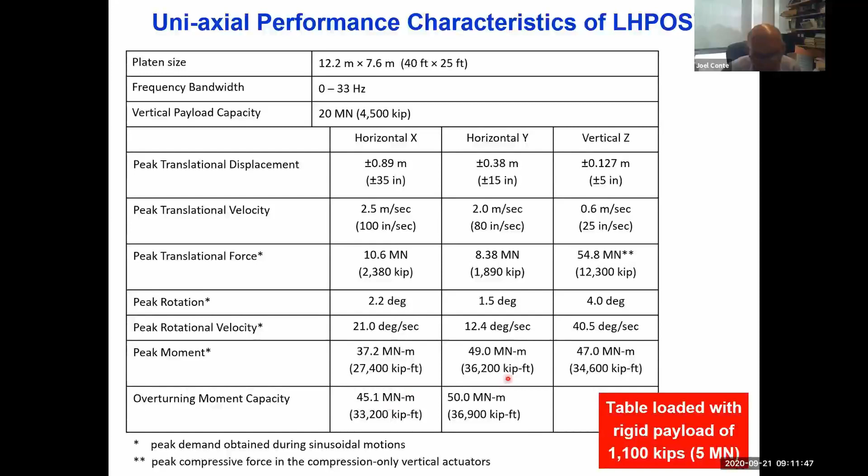We are also in the process of the upgrade. We used MTS, which has a model of shake table that they can customize to every shake table. So we worked with them to customize it to our upgrade and calibrate the parameters to get the best possible setup. We tried here to show you how well the upgraded shake table will be able to reproduce earthquake ground motion.

This is the Chi-Chi Taiwan earthquake. You can see the target in red, the real earthquake record in red, and the one that we predict will be reproduced by the 6 degree of freedom LHPOST. So it's very promising. You can see it remains an accurate table.

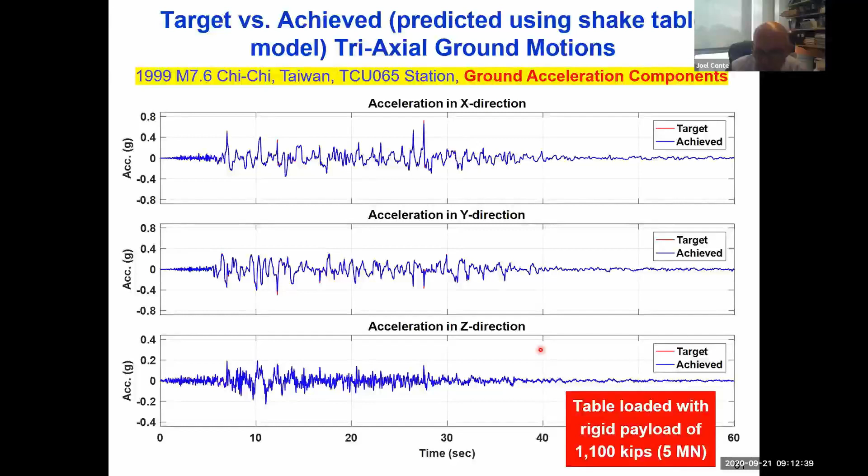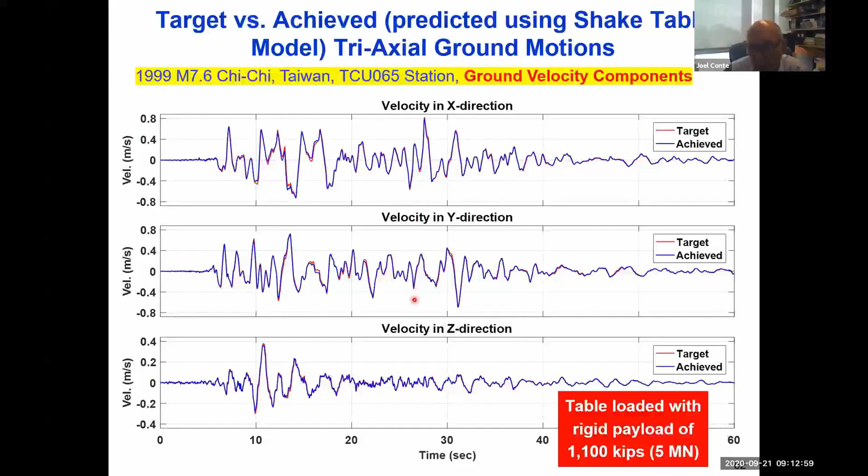So I want to talk also about, I still have time, the modular test bed building. We have here basically a large-scale testbed building that will be available as a shared use equipment. It will enable low-cost testing of components and systems, since researchers will not have to reserve funds to build the building. So it's a building that will be reconfigurable.

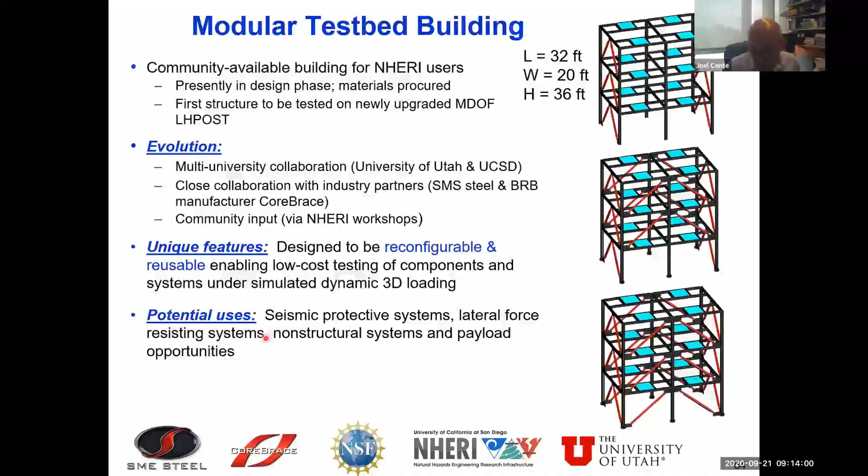It's full scale here. You can see the length is 32 feet, width 20 feet, height 36 feet. It will allow testing of seismic protective systems, lateral force resisting systems, non-structural components, and so on. It has very interesting features. Every floor can be built as a moment frame or as a brace frame. You have a number of replaceable devices where the nonlinearity will be concentrated, like buckling restrained braces, special moment frame joints, or shear fuses, for repeatable nonlinear behavior.

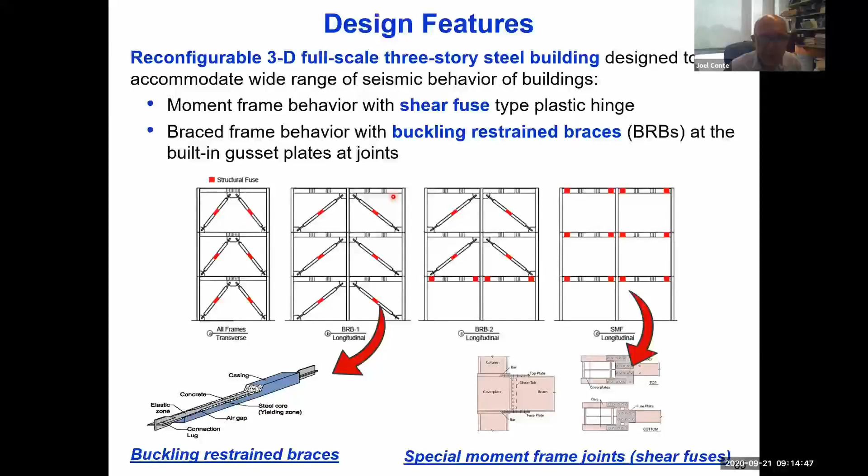This was designed by our 2 colleagues, Professor Gilberto Mosqueda, Tara Hutchinson, and Professor Chris Pantelides from the University of Utah. It will become available by the time we reopen for 6 degrees of freedom. It will be available. Now, new research opportunities made possible by the LHPOST 6.

I have just 4 slides now to conclude this presentation. I try to summarize here a number of topics, and maybe this would also be a good starting point for the breakout session tomorrow.

We will be able to study the response behavior of large-scale specimens in 3D, at large or full scale, under the combined effect of not only the 3 translational ground motions, but also the rotational ground motion, which traditionally have always been neglected for 2 reasons: because they have not been measured in the past during real earthquakes - now they start to measure them, and the field of rotational ground motion seismology is a very fast evolving field right now - and because the seismological community assumed that they are negligible.

There are a number of papers in the literature showing that certain structures, tall buildings and tall bridge towers, could be very sensitive to rotational ground motion components, like the cartoon shown by Professor Trifunac from USC in a 2009 paper. If you shake this building in the horizontal direction, you're going to have drift of the building just due to the horizontal excitation.

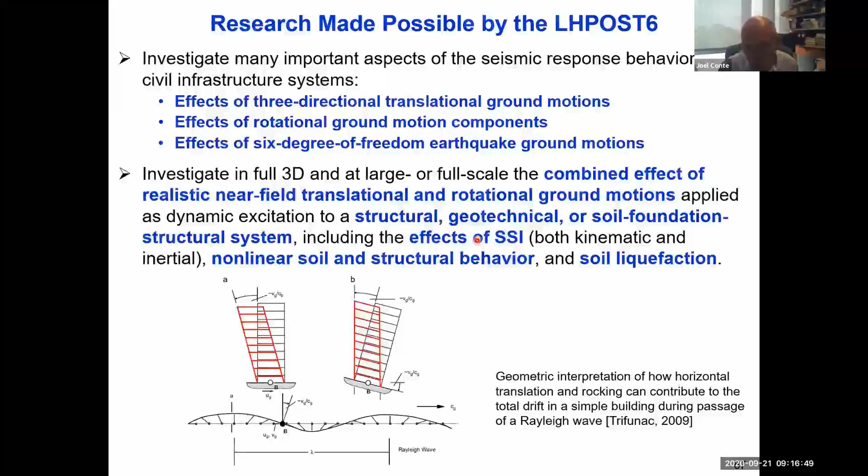Another important topic is inherent damping in structures. What is a realistic model to use in simulation for damping? It's a topic where there is no consensus yet. So doing some targeted experiments with 6 degrees of freedom excitation should be able to bring some light into this topic and some guidance on what kind of damping model to use for numerical simulation.

Experimental study of dynamic soil-structure interaction, kinematic interaction, and inertial interaction - three types of experiments will be performed. In one, researchers will model a system including the structure, foundation, and soil in the computer, do a state-of-the-art simulation, and get the total foundation motion, including the three translations and three rotations. Then we will play on the platen these total foundation motions with only the building on the platen, and compare the response to what was purely simulated numerically.

Or some hybrid test, like I talked about before, where the superstructure will be on the table and the soil will be modeled in the computer. Or using the large soil boxes, where we will build a specimen of the foundation and superstructure at reduced scale, still large scale, embed it in the soil box, and then shake the soil box at the base with either tri-axial or 6-axial excitation.

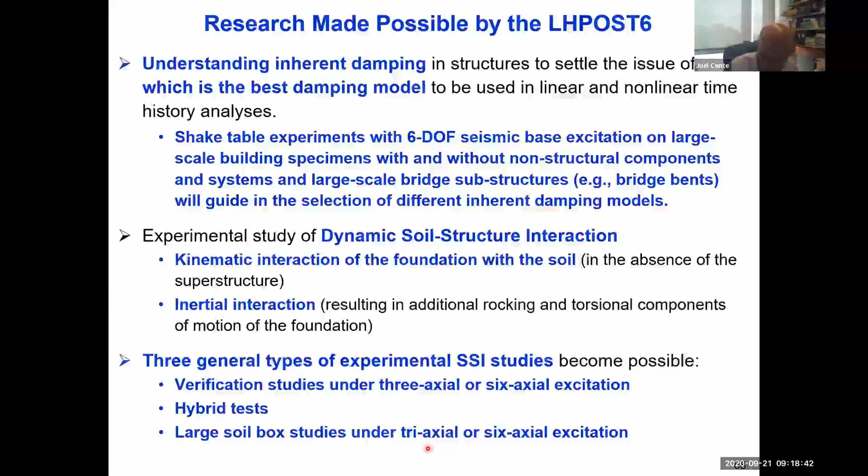In terms of real-time hybrid shaking table testing, there will be room to expand on the complexity of large-scale tests that can be done in a hybrid way. This is a delicate topic because of the risk of impact between the platen and the reaction mass, which could damage the facility when we debug the hybrid algorithm. So that will be a delicate issue, but there is tremendous room for developing hybrid testing at large scale.

If you consider unreinforced masonry buildings, walls of such types, when subjected to uni-axial in-plane forces, tend to exhibit much better performance than if you apply biaxial horizontal excitation, and you experience out-of-plane collapse. What about if we bring vertical ground acceleration into the picture? This could also play a big role.

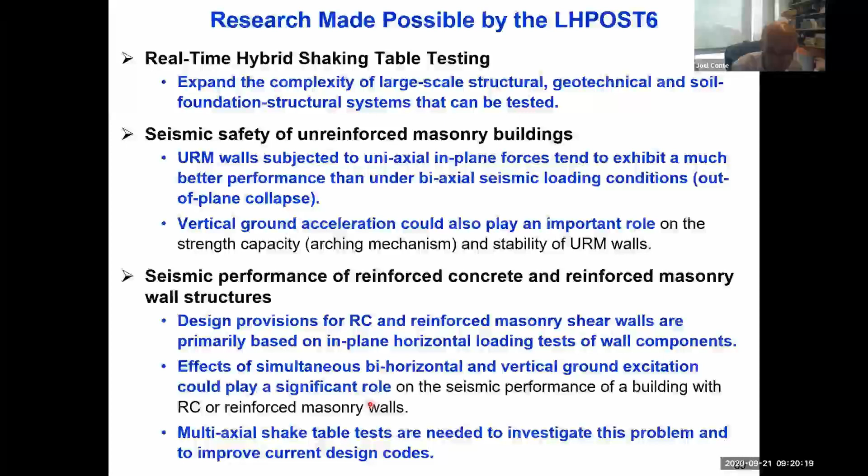For reinforced concrete and reinforced masonry structures, many of the design provisions are based primarily on in-plane horizontal loading tests of these components. Again, when you have bi-horizontal and vertical excitation, it could change the results quite a bit. So multi-axial shake table tests are needed to investigate this problem and further improve current design codes.

And the last point here, for non-structural components and systems that represent a very large value in tall buildings, it's important to improve our understanding of the seismic response of these systems under multi-directional earthquake excitation, so that a reliable unified design methodology can be developed for these systems.

There is now a trend toward low-damage, or in the extreme, damage-free, maintenance-free earthquake protective systems, such as self-centering systems, rocking, and accelerated bridge construction. These systems have pretty complex kinematics, and a lot of them have only been tested in uni-axial behavior. It's important to test them under more realistic multi-directional earthquake input.

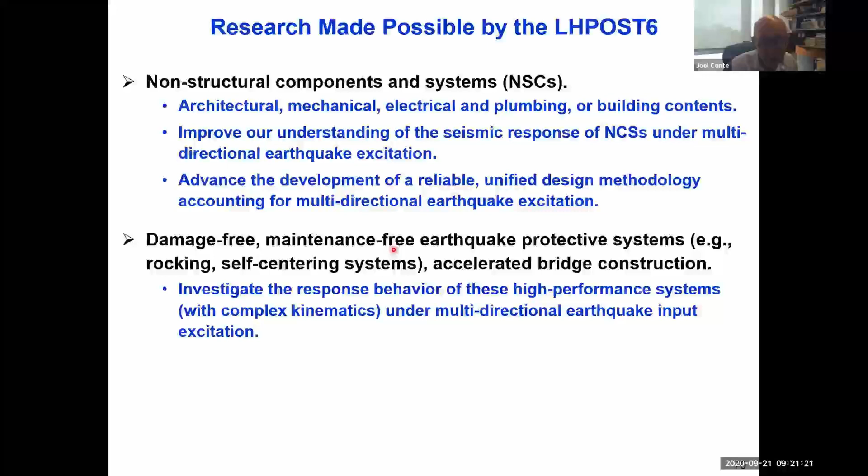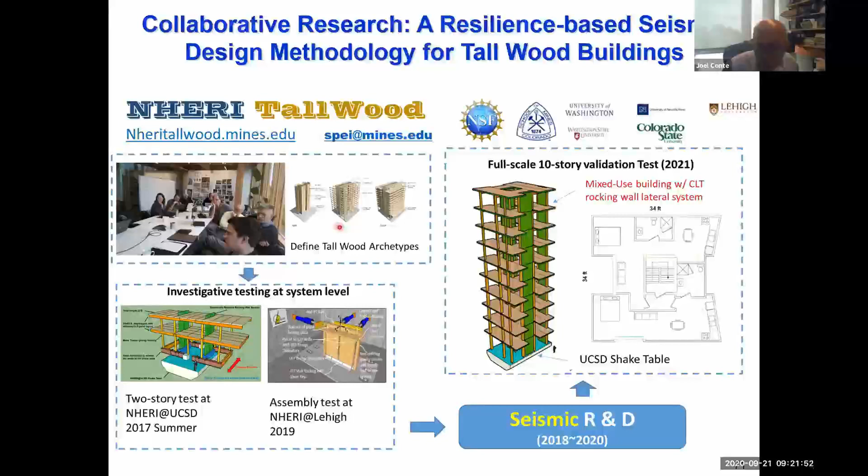After we reopen, we will first test the reconfigurable test frame building that I talked about for two weeks, as a guinea pig for the new system. Then we will have this full-scale 10-story timber structure made out of cross-laminated timber and rocking walls - I think Professor van de Lindt will probably talk more about it. This will be a very exciting test to start with. You see a rendering of this test here.

And thank you very much for your attention.